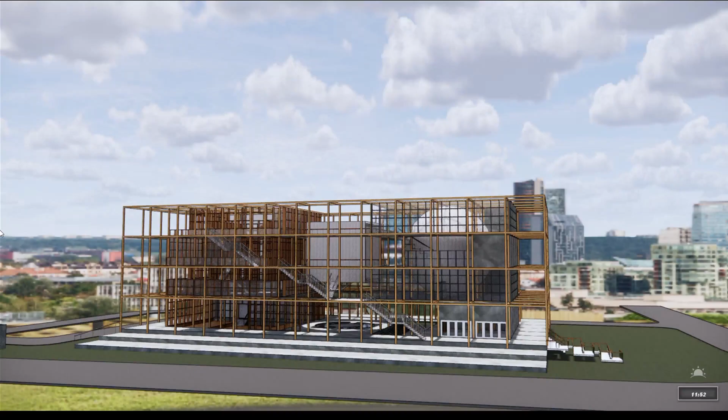Hello, I'm Angie, and today I'll be introducing my project, The Storyteller, a library theatre hybrid. I decided to design a library theatre hybrid into our site as an intervention.

Our site is located strategically in the education district of Kota Tinggi, and from my personal literature review and analysis of the site, I found out that one of the main concerns of the education system in Malaysia is its lack of creativity and structural rigidness due to its non-creative approach in teaching, as well as the lack of appreciation of the very rich culture and history of Kota Tinggi by its citizens, causing it to be underdeveloped.

These two reasons actually overlap slightly, where the years of rigid education system have caused our people to be uncreative in developing and seeing potential in their homeland, and hence the storyteller, a contrasting blend of two vastly different typologies, the library and theatre, that represents itself as a solution to the underappreciated culture and lack of creativity through two contrasting yet very similar elements, books and plays.

After that, I started analyzing the literature and filmography inspired by Kota Tinggi. And what I came up with was that the written manuscripts acted as a base and a source of knowledge that was densely packed with information, whereas plays and films were fanciful, delightful, very expressive and visual. While both are quite different, they complemented each other.

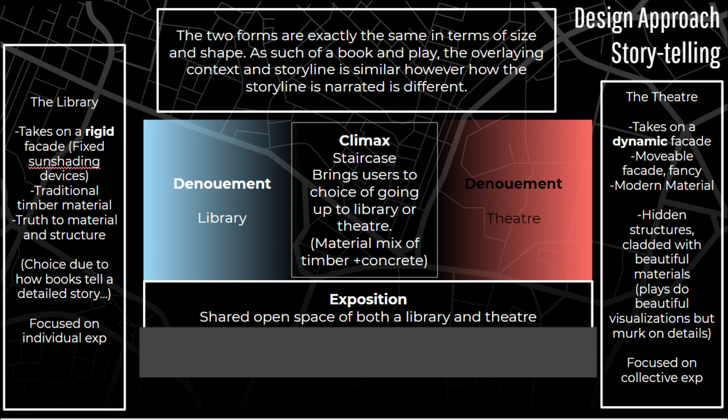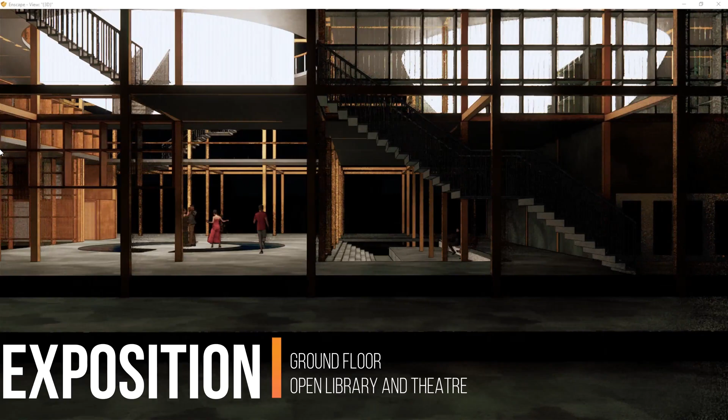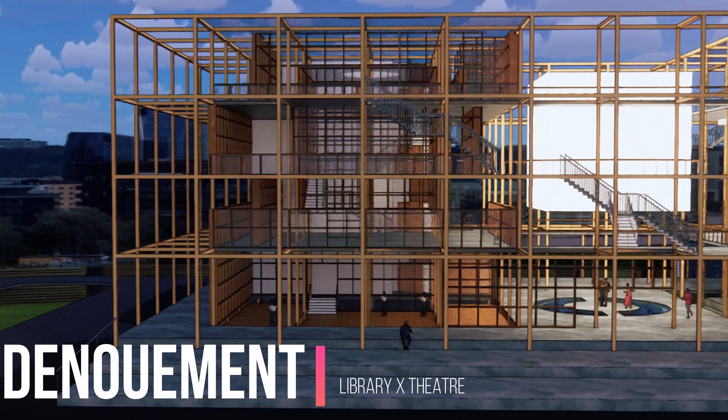On a spatial experience, users are brought into my space like a story, through exposition, a ground floor area of shared open spaces of both the library and theatre, easing the users into the magical story. Then the climax, the staircase that is accelerating and brings users up to the tipping point. And then the denouement, a library and the theatre space.

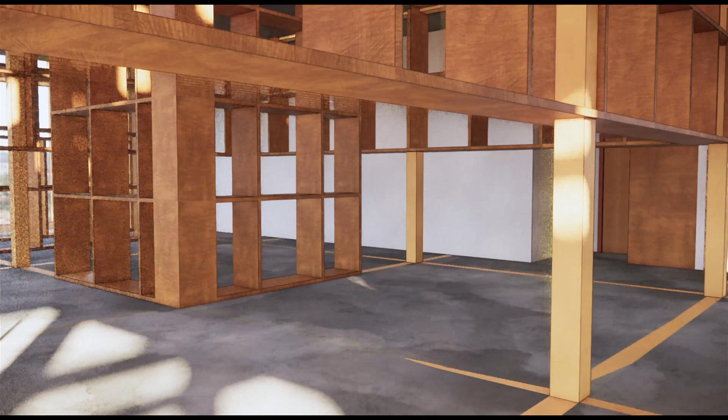For my formal library space, it is a box space within a space, where you go through a journey of grids and a 2D floating cube that stores the rich history of Kota Tinggi, with a staircase within the cube connecting the entire 3 floors of the library.

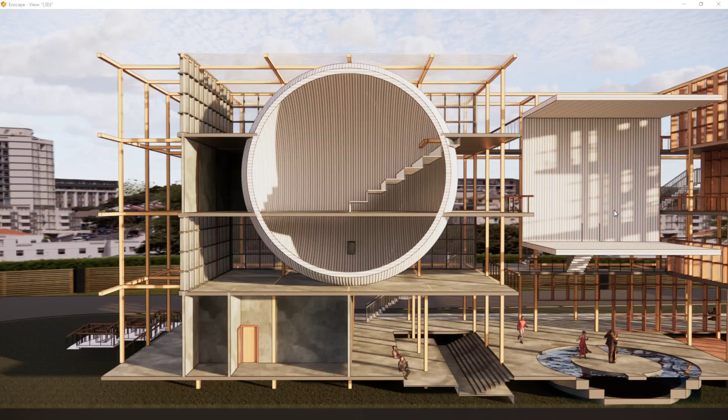For my formal theatre area, it is a huge daunting sphere centered in a cube form. Similar to how plays are, it follows the same seemingly boring plot. However, it's visualized in a magical way, also having the idea of a floating hollow sphere that might store a stage or act as a sculpture. Yet its hollowness allows visual connection between the library and theatre space, allowing for a conversation between the two spaces.

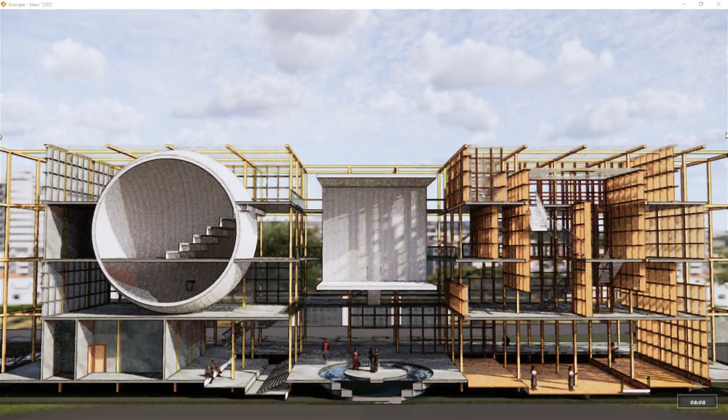So let's get into my plans next. As you can see, I allowed for a more pedestrian-friendly approach in my building, with the frontal area facing the river void of any vehicular lanes, allocating 2 drop-offs in the center back and right side here, where parking is also allocated at the side.

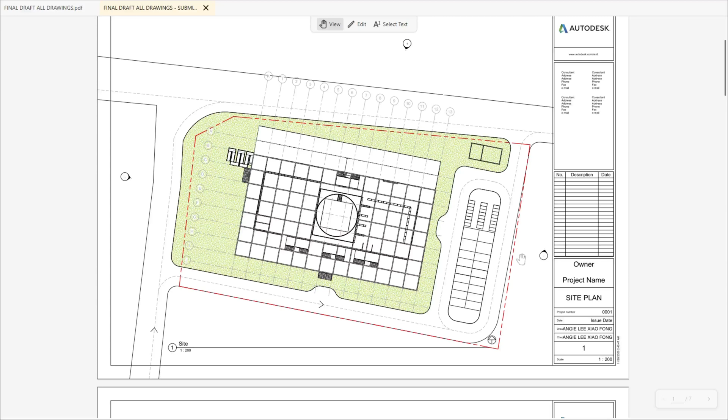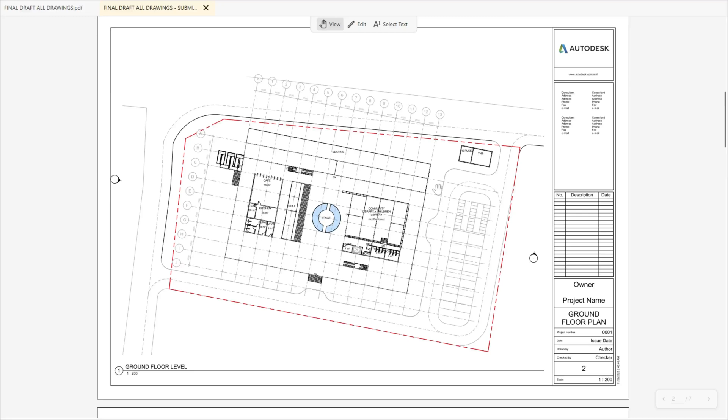Next, going into the ground floor plan, I have several main spaces, mainly the open theatre, the open library containing the community and children's books, as well as a cafe by the stage and seating area. Services such as the toilets, lifts, and prayer rooms are located in the area at the back away from the river. I also located the TNB substation and refuse station here.

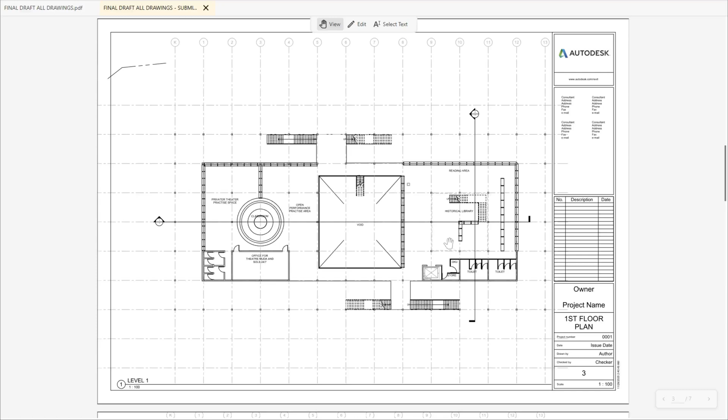Next, for the first floor, a pair of staircases flanks the front and back end of the building, providing vertical circulation for both main spaces, and the office spaces for the librarian and theatre are shared here with a toilet right next to it. The theatre space has an indoor practice space and an open performance space, while in the library there is a staircase with a cube leading up to a volumetric space full of historical books, with open reading spaces wrapping the cube, while a staircase is also located in between the two spaces going into the floating cube.